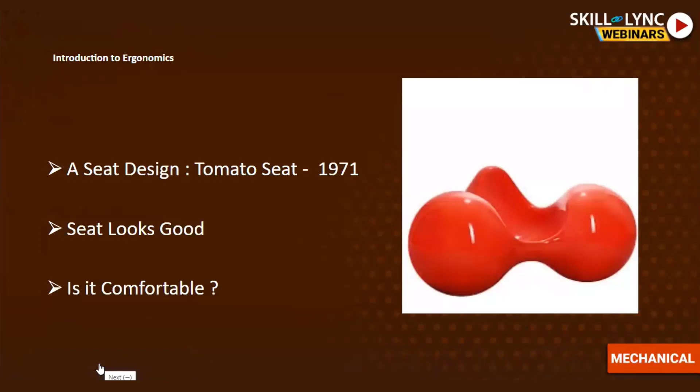Okay, so first is introduction to ergonomics. As you can see here, the tomato seat was developed in 1971. If you look at it, it looks aesthetically good, but is it comfortable to sit there? If you sit for 5-10 minutes, you'll say okay, it's a little bit comfortable. But what if you need to sit there for 8 hours? In that case, it is not comfortable.

So here is the definition of ergonomics. Ergonomics is the science concerned with designing and arranging things people use so that people and things interact most efficiently and safely. In short, we need to design the product in such a way that people will feel comfortable about it, and people will interact more.

So where did ergonomics come from? Ergonomics came from the Greek word 'ergon' meaning work, and 'nomoi' meaning natural law. So it's the science of designing products which humans use in day-to-day life.

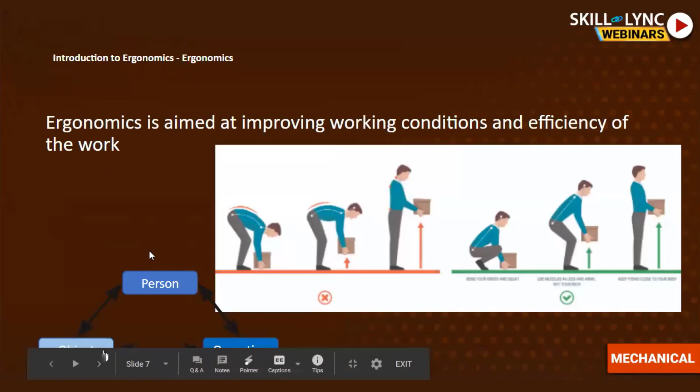Here you can see you have one task: to lift the box. Let's say that box weighs 5 kg or let's say 10 kg. In the first image, as you can see, he is bending and then lifting with the help of his back. So this is not a recommended way.

If you see the next picture, he is sitting, picking up the box, and lifting with the help of his leg. So this is the correct way, or I would say this is the correct process.

So here ergonomics takes part, like how the process needs to be designed so that it will be more comfortable for the person. Or let's say we are using a number of products in day-to-day life, so how those products will be more comfortable for humans - that is where ergonomics comes in. As I have shown here, the person, the operation, and the object - these three parts are related because we'll be working on such objects and doing some operations. So ergonomics is related to giving comfort to this process.

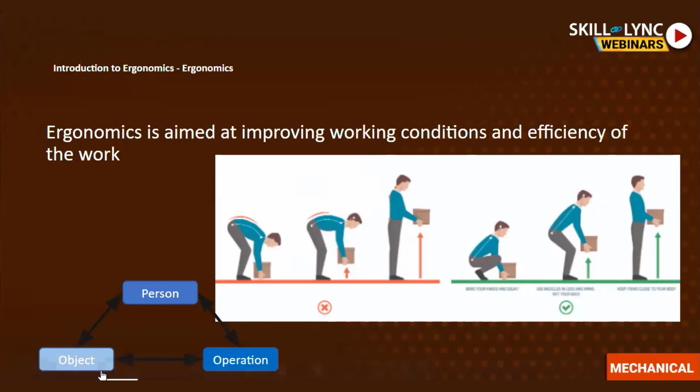So in ergonomics, now you know what we wanted to do - we wanted to give comfort to humans. So how do we give that? The first one, and one of the most important terms in ergonomics, is anthropometry. Anthropometry is the branch of science which measures the size and proportion of the human body, especially as applied to the design of various products that we use.

You may think why it is important, why it is needed, why we need human dimension. As you know, we are living in one country and we can find a number of people with different sizes - few people are shorter, few are taller, few are normal. So we have a number of variations. In order to catch those variations, we need to first study how people are segregated. That is why anthropometrics is important - to measure the human in all aspects, like height, weight, and strength.

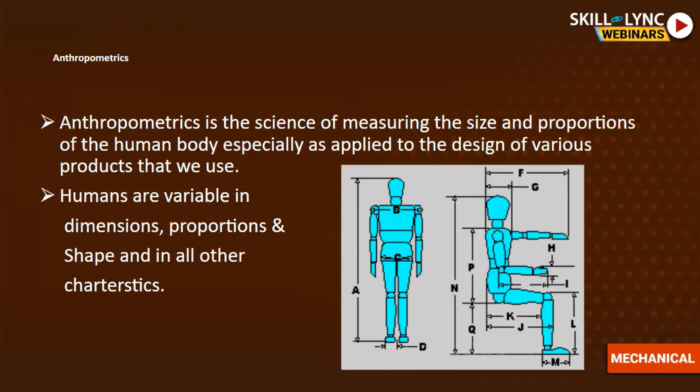Second, as I already said, humans are variable in dimension, proportion, shape, and in all other characteristics. So to measure that, we will be using anthropometry.

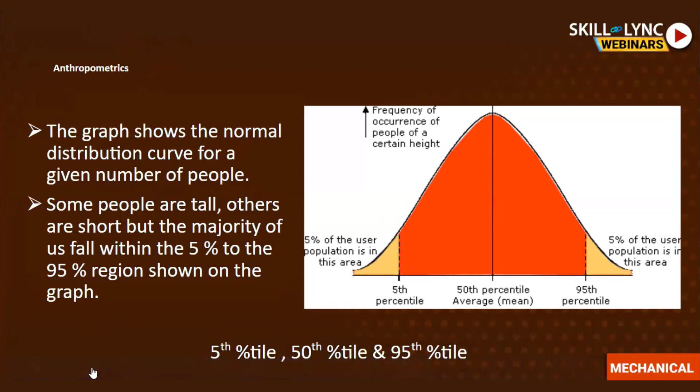We talk about the 50th percentile - it's like the mean, so 50% of the population will be shorter than him and 50% will be taller than him. The next term is the 95th percentile, meaning almost 95% of the total population will be shorter or of less strength as compared to this man. So these three terms are more important in the field of ergonomics.

If we move to the next slide, things will be clear - what is percentile? Here on the left side you can see men, on the right hand side you can see women. They have given 1 percentile, 5 percentile, 95 percentile, 99 percentile. The 1 percentile is shorter, the 5 percentile is shorter than 95 but more than 1 percentile. So this is how it is.

As I already said, if we take the example of the 5 percentile, he will be taller than the remaining 5 percentile of the population. If I say 95 percentile, then he will be taller than the remaining 95 percentile. Most of the products that we use in day-to-day life are designed in terms of the 95 percentile and 5 percentile.

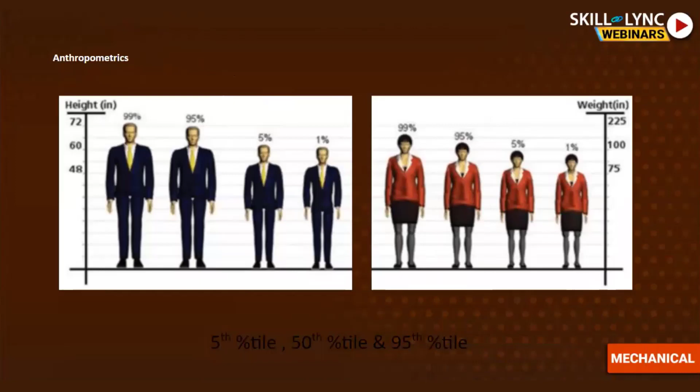Similarly, if we come to the women's section, a woman's height is a little less than men. So if we take the 99 percentile in women and male, it is a little shorter. But again, the same chronology is applicable here - 1 percentile, 5 percentile, 95 and 99. Based on the full population, they are segregating terms like 5 percentile, 50 percentile, 95 percentile. We will be studying these percentiles in ergonomics, and with their help we will be designing the product.

Next is why ergonomics is important. Whenever we are doing a job and your body is stressed because of awkward posture, extreme temperature, and repeated movements, you may feel irritated and your musculoskeletal system may get affected. Your body will observe fatigue, discomfort, and pain, which will be the first signs of musculoskeletal disorder. Your mind will say, no, I don't want to work, this is not right, the task I am doing is not correct. This will all lead to musculoskeletal disorder.

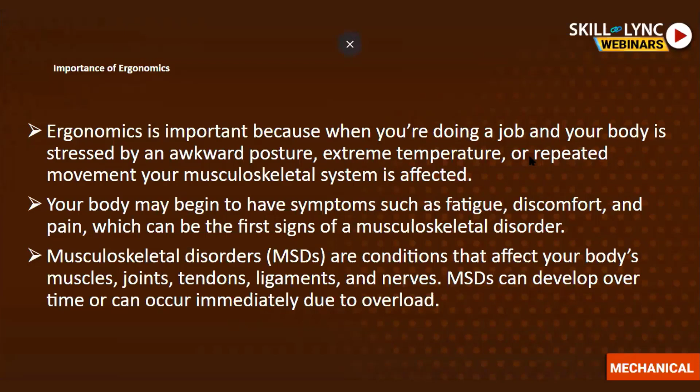So what is musculoskeletal disorder? These MSDs are conditions that affect your body's muscles, joints, tendons, ligaments and nerves. MSDs can develop over time or can occur immediately due to overload. Let's say you are doing some task and that task is not ergonomically designed, then you may feel back pain or pain in joints. This will lead to musculoskeletal disorders. So in order to avoid that, we need to design each and everything we use in terms of ergonomics. Here I have given a few examples for the same.

So this is how ergonomics works, and this is the change you can see here. This is the task of an ergonomics engineer, to check things and design in terms of human comfort. So here are a few more examples.

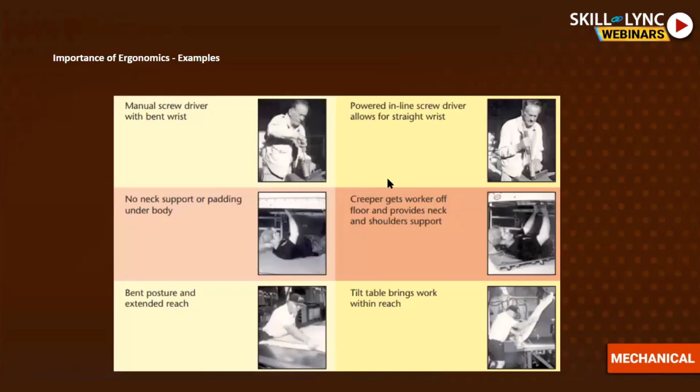In the first one, the person is operating a screwdriver, but his wrist is bent, so after some time he may feel joint pain. In the second one, they have given a power inline screwdriver, so his wrist will be straight and he can work more comfortably.

In the next example, one person is working under a car, doing some underbody operation. Here you can see he has no support for his neck or his body, so after some time his neck may feel irritated and he may feel pain in the neck. In the second case, they have given full body support as well as neck support, which improves his comfort and lets him work more effectively.

In the last example, maybe he's a designer, designing or drawing something on a large drawing. He needs to bend, extend, and reach to work. So what they have done is given him a tilted table, so it is not required for him to bend or extend—everything is done with the help of the tilt table, and he can perform the operation comfortably. This is ergonomics: designing things to be more comfortable for humans.

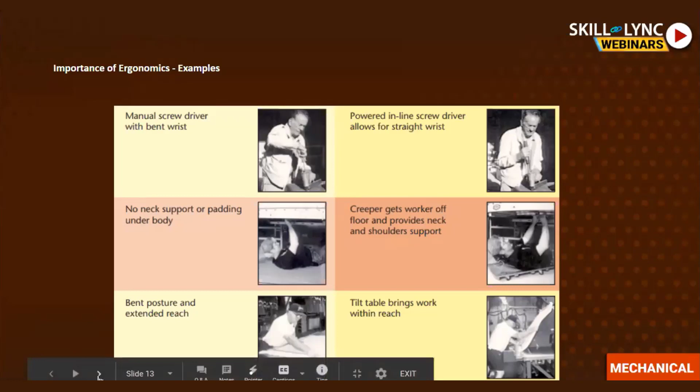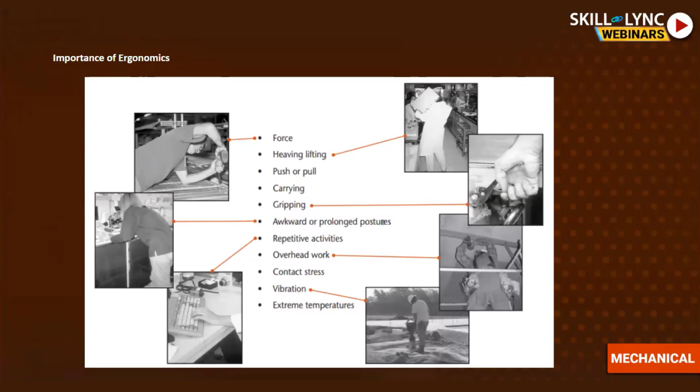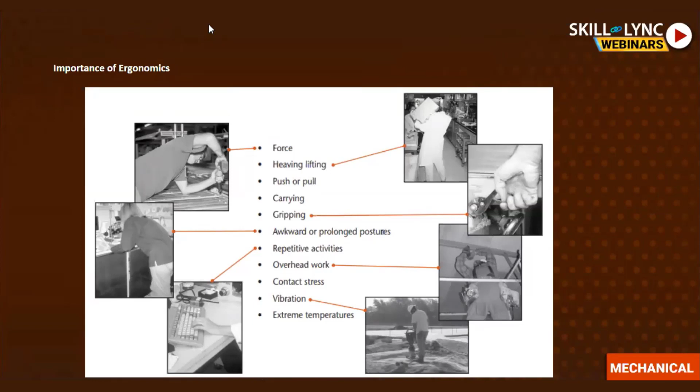So here again they have given the terms which cause discomfort to humans. The first one is force—if we are handling more force, after some time we may feel irritated, such as lifting heavy objects, pushing, pulling, carrying. In case of gripping, as I already explained, there are awkward and prolonged postures, repetitive actions, overhead work, contact stress, vibration, and extreme temperatures. All these things, if the product is not designed correctly, will lead to human discomfort. That is why ergonomics is important in our day-to-day life.

Now that I've taught you about the examples and some definitions, let's take it practically. What if I told you that you need to hold one glass of water? You'd say yes, I can hold it. What if you need to hold that glass for 1 hour continuously? Most of us would still say yes, I can hold it. But what if I told you that you need to hold the same glass for 8 hours a day, and perform this same task for 365 days? Then definitely you would say no, this is not possible. This is where ergonomics comes in—doing things comfortably. We also need to consider how much time a person is working.

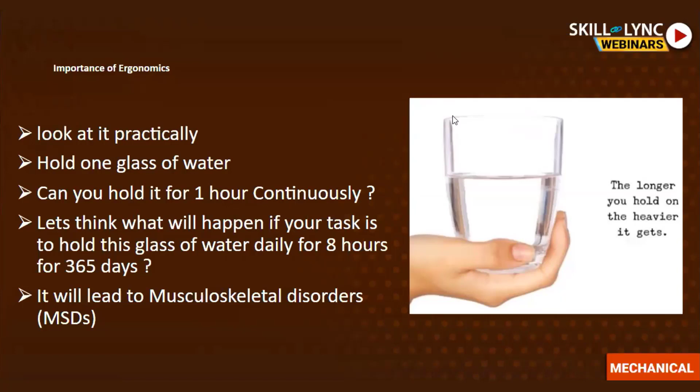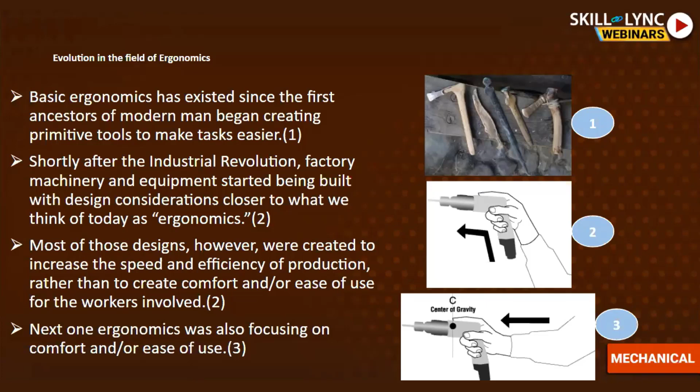So based on all those things, we need to design the product ergonomically, because otherwise it will lead to musculoskeletal disorders. Evolution in the field: in the first image, they have shown some tools used by our ancestors. As you can see, those tools we can grab easily, so we can say those are designed ergonomically because we can easily grab and work on them. But they have not taken into consideration the industrial revolution — they were designed in terms of the human hand, but they have not taken human comfort into the factor.

Shortly after the industrial revolution, factory machinery and equipment started being built with design consideration closer to what we think today as ergonomics. So later on, they started designing the product with the help of ergonomics, like how a human can do it comfortably. But again, there is one more catch: in that era also, most of these designs were created mainly to increase the speed and efficiency of production.

At that time, in the second image, the focus was more on increasing speed and efficiency. As you can see, they have not taken into consideration the weight of the tool or where the center of gravity lies, because based on that we need to design the tool. But if you see the third image, there they have designed the tool by considering the weight, by considering comfort, and by considering the center of gravity.

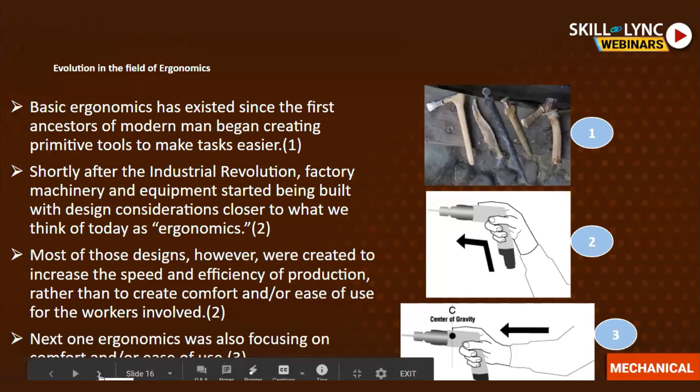In the next generations, all the things were focused based on comfort. So now whatever products we are using in day-to-day life — let it be your chair, let it be your laptop, let it be your bike — all these things are designed ergonomically based on human dimensions and human comfort, and those products should not cause any discomfort to humans. So all the products that we use need to be designed ergonomically.

Let's say the driver is driving the plane. A lot of screens are there — on which screen does he need to focus, and what content needs to be on each screen? Again, a lot of controls are there. Let's say the plane also has some accelerator kind of thing — that accelerator needs to be in his reach. So whether that accelerator is within reach, whether all the emergency controls are situated near him, and whether the controls he doesn't need frequently are situated a little further — has he done that, has this human-machine interface been designed ergonomically?

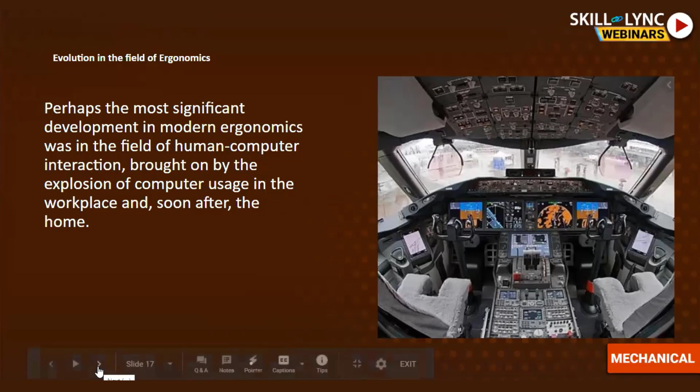So all these things come into picture whenever we are designing a product which deals with screens. This is one of the most recent evolutions in the field of ergonomics, and ergonomics in the field of automotive, transportation, and aeroplanes all use this.

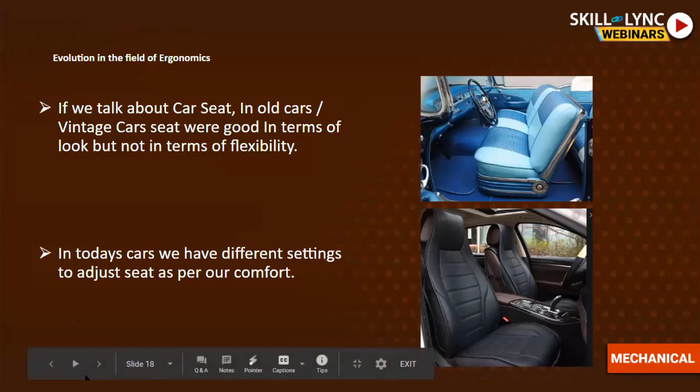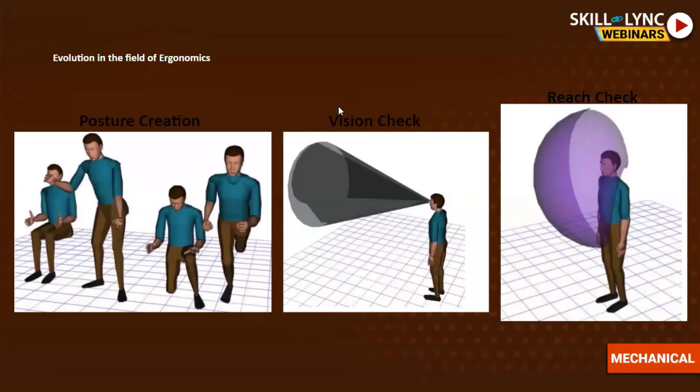In the second image, you can see one person standing, and there is a cone in front of him. That is nothing but his vision, like what the person can see from his eyes. So that also we can check in software.

The third one is a reach check. The person again is standing, and the zone which you see in purple color is nothing but the reach of his right hand. So all the things which are under this zone he can reach. All these things we can design or create in software. We can analyze there and design the product ergonomically.

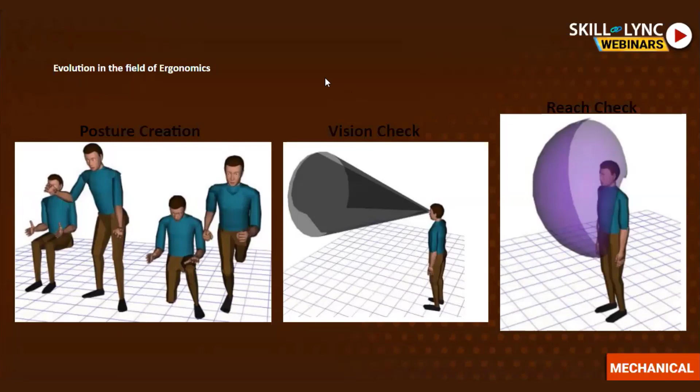As I already told you, the seat has movement. We can move the seat towards or away from the steering, we can change the back angle, and we have other options as well. As we already know, we have different people of different dimensions, few people are shorter, few are taller. If a shorter person is sitting in the car, we need to move the seat a little towards the steering so that person can drive comfortably.

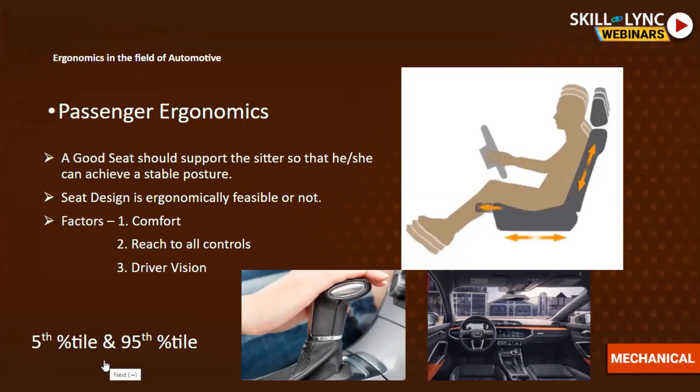If a taller or lengthier person is M95, whose height will be more, say an M95 male or a 95th percentile woman is sitting on the seat, in that case we need to check whether, while sitting, he can sit comfortably and drive comfortably. So in order to accommodate this population of different sizes in the automotive car, they have given movement, like we can move the seat. But by how much? The designer has to think about how much limit we need to give, how much seat movement we need to give to the customer. So that thing we need to check in software in case of automotive ergonomics.

So this is one key point: is the seat design ergonomic and feasible or not? What are the main factors we are checking? First is comfort. Second factor is reach to all controls. As you know, in automotive we have the gear handle to move the gear, the brake pedal, the accelerator, and the clutch. Can a shorter person or a taller person reach all those controls comfortably and work comfortably to reach the controls? So those things also we are checking.

The next one is driver's vision. Let's say a male 5th percentile, who will be a little shorter, is sitting on the seat. While sitting, can he see everything through the windscreen? Can he see everything which is on the road? So that thing also we need to check. This is where ergonomics takes part in case of automotive, and that is the passenger ergonomics.